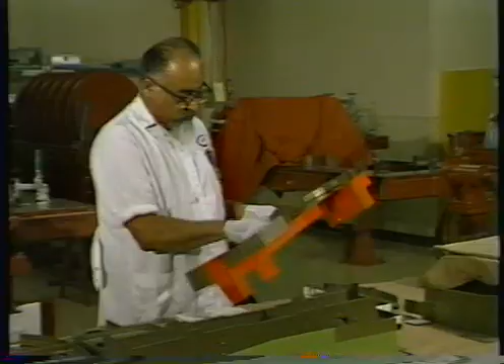Life imitates art in this dilemma that has reached every sector of American industry. For the next several minutes, we'll discuss this growing industrial crisis and what General Dynamics has done about it. While the issues we explore may seem complex, the solutions rely on basic employee ideals: commitment to quality, teamwork, enthusiasm. It all boils down to the individual.

Today, many U.S. companies create products in a vacuum, each station throwing its completed task over the wall to the next. We've simplified a complex issue, but I'm sure you've heard about or encountered some square pegs where you work. You know the real frustration caused by a vicious cycle of changes, rework, and more changes.

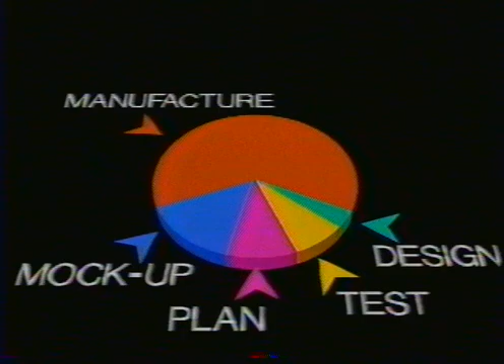The results of our self-imposed barriers have cost us dearly. Even though a product's design phase comprises a tiny piece of the development pie, decisions made early lock in the bulk of later spending. For a typical electronics product, costs rise dramatically as changes are made at each development stage. During final production, any redesign is especially devastating, an expensive alternative that must be remedied.

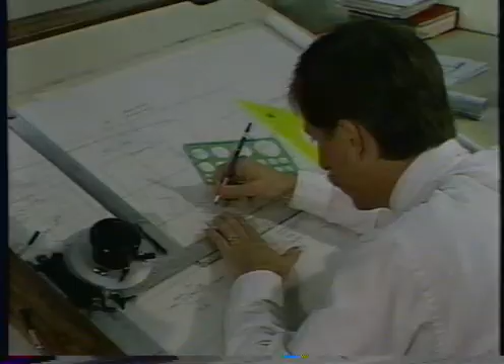And what of the human cost? How does one measure the effects of frustration caused by a system that doesn't work?

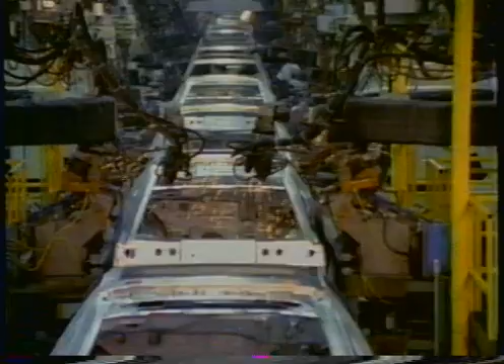During the 1980s, America's solution to this vexing problem was automation. We thought we could out-manufacture the competition with high-tech machinery. Unfortunately, American industry missed the point.

Product development, unlike an assembly line, doesn't happen on a straight line. Rather, it's an intricate web. Individually, the threads are extremely fragile and easily broken. Molded together, we can create a fully integrated, powerful workforce.

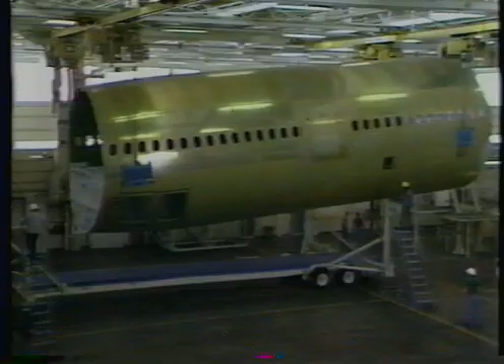At General Dynamics Convair Division, we have a proud heritage to uphold. Over the years, people in the armed services and private sector have come to rely on us and our products. For some of our customers, quality means the difference between life and death.

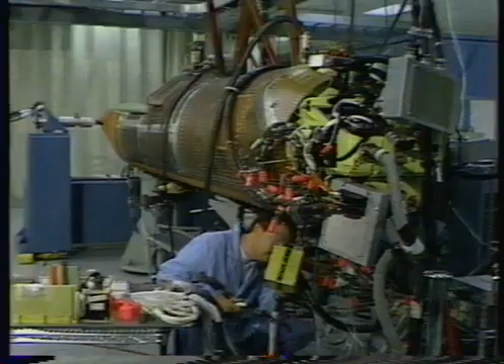But our leadership role has been threatened. Increased complexity, competition, rising costs, shrinking defense budgets, all have had a major impact on our ability to win new programs and strengthen our future.

It's ironic to think that while Convair's work contributed to the winds of change in world politics, it would also change the way we do business. We must change in order to survive.

In an attempt to meet these challenges head-on, Convair has established the Integrated Management Systems Project. Perhaps you've read about or already heard about their ongoing efforts to develop advanced systems and tools, all aimed at integrating our product development threads.

Just as important, though, is their emphasis on cultural changes in the workplace, a real shift in how we create products. If you have to boil the IMS program down to its very basics, we're trying to provide for the...

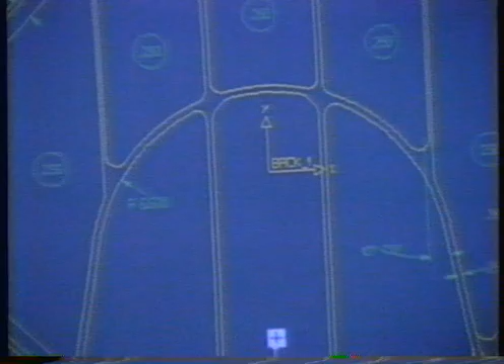generation and sharing of data from the development of a proposal to the government through design, through preparation for manufacturing, integrated logistics support, right through the retirement of the product that's been developed. And throughout that process, have a common database, one common database that everyone makes use of.

Sharing data, being able to get the right data, is the key to concurrent engineering. The effort in the IMS area with focus on concurrent engineering will be to consider the entire process from design to manufacture to maintainability, and to take those issues into consideration before the final design is released into manufacturing.

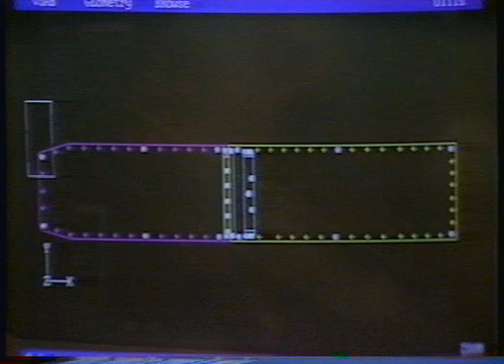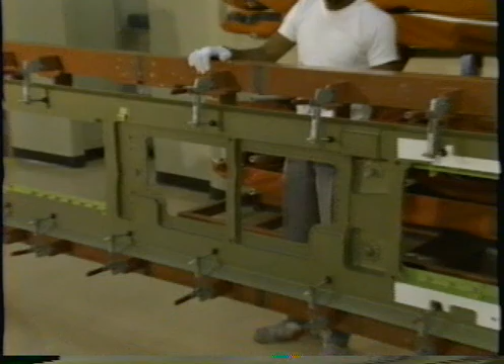Our focus now will be to develop a product with an emphasis on being able to manufacture that product. Selecting the right process and tools before we release it into production. We're going to try and do it right the first time.

For now, let's suspend what we know or what we think we know about IMS, total quality management, or concurrent engineering. You'll probably get a different definition of each depending on whom you talk to. Bottom line is, we need to develop new products quickly.

Those products must be cost-effective and reliable. It's the only way we can increase our business in a rapidly shrinking marketplace.

Not just this program, but a lot of programs are being accused right now of being too expensive, not delivering the performance, and being late to schedule. In the environment that we're in, with the shrinking defense budgets and so forth, we still want the performance. We still want the best vehicles, the best weapon systems in the world, second to none.

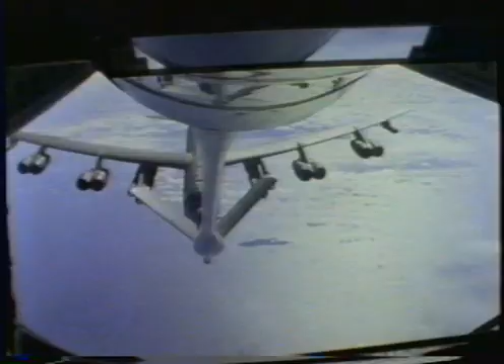You've got to find a smarter way to do your business. And one of those ways is to have this concurrent engineering, or as we put it here at ASD, the integrated product development. I am absolutely committed to concurrent engineering.

I see that as an outgrowth of TQ. It's the right thing to do, and it's starting to work in a number of areas.

The right thing, not only for customers and contractors, but for suppliers as well, who, for the most part, build over 90% of what goes into new products. For example, at Williams International in Utah, where the engine for our advanced cruise missile is built, their long-term commitment to fully integrated product development has begun to pay off.

We can trace it back at least 12 or 15 years when we started the concept called integrated teams, where we decided that for us to get our product into manufacturing at the right cost and on the right schedule, the right quality, you cannot do the design-to-production phase in serial—in fact, you really have to do it as a parallel effort.

So in one of our programs back in the early 80s, one of the cruise missile programs, we started working with the concept of simultaneous engineering.

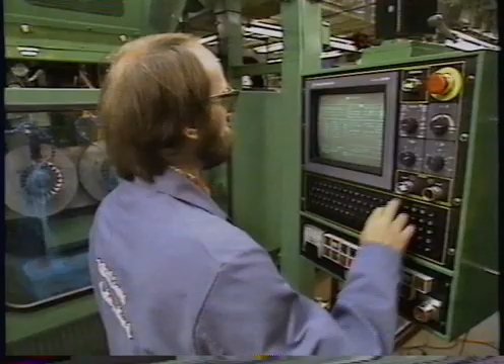What's really good about simultaneous engineering is that you get the manufacturing commitment locked in way up front in terms of what it takes to bring that product on stream, make it at the right cost with the right quality, and sustain it throughout its life.

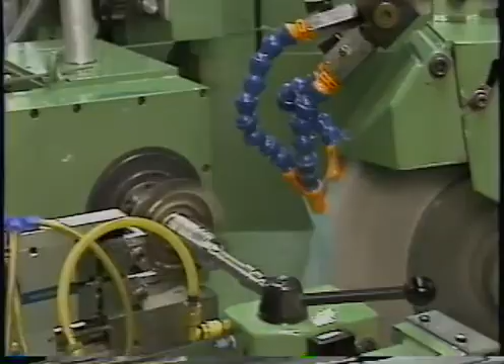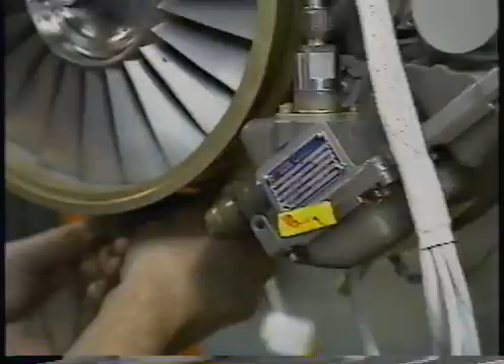The engine company for us, Williams International, has been doing this for a number of years. I was up there several months ago, and we got started into this briefing. Every one of their engines, every one of the spare parts had been delivered to the user - that's the Army, the Navy, the Air Force - on or ahead of their schedule, at the price that they quoted on the contract, and at the performance that the user had asked for, the customer had asked for. And I said, stop. How did you do that?

Well, I would like to say it's the way in which we've modernized the last 3.5 years, because that's how long I've been here. But we've been doing it a lot longer than that, obviously.

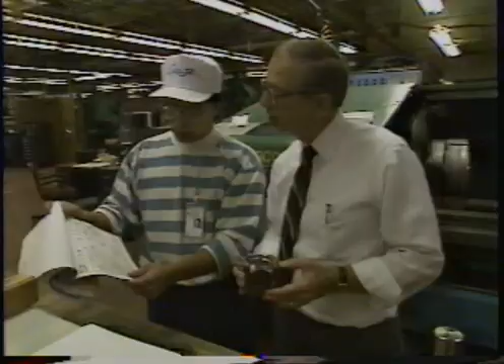I think the key is several-fold. First of all, you have to have a nice, stable product. If you talk to the people that use the engines, our customers, you'll find that they are highly reliable, they're simple to maintain, and consequently there have not been a lot of design changes with our particular product, as there may have been in other kinds of applications or other kinds of engines.

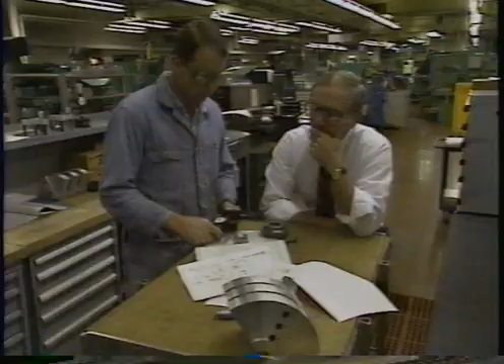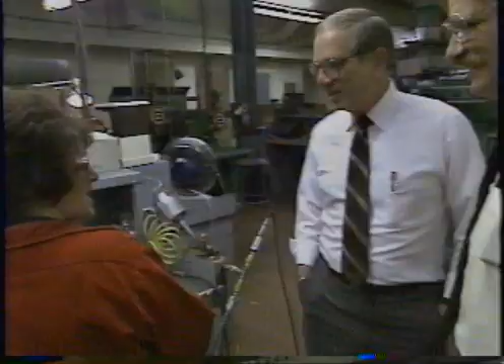That's number one. I think number two is the whole concept of going through simultaneous engineering early on in the program, and then once the program is up and running, not forgetting about that concept, because we still have simultaneous teams to maintain the product during the life cycle of the product.

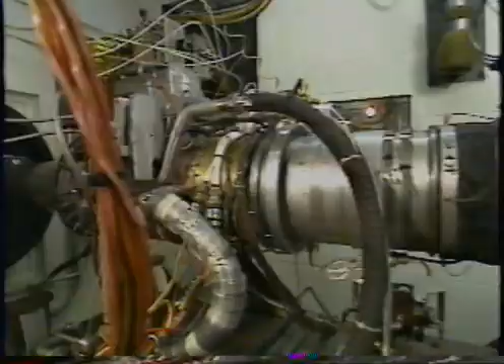When you step up to that kind of a commitment, and everybody knows from almost day one what's expected in terms of performance of that product, in terms of what the customer is looking for, in terms of our own individual quality goals and our cost goals, then it's very easy to make schedule. It's almost routine then to have that kind of performance, because all the other issues are out of the way. All the games playing are out of the way.

Suppliers are going to be our partner in the future. And it's not going to be by contract terms and conditions. It's going to be by a very close working relationship where we depend on them to not only deliver on time, but product that is supportive of the quality standard we must meet, the warranty requirements, the reliability that the customers ask for. We'll work together, not just electronically and communications, but as a team around the table, taking ownership of the total process. It's going to be something new for us to do.

Our typical problems with supplied material are documented. We need to learn how to work together to manage the process better. We look forward to companies like Williams who are truly working hard to establish process controls, minimize the variability in the manufacturing process, improve the quality standards, so that every time we receive product from them, we can count on it.

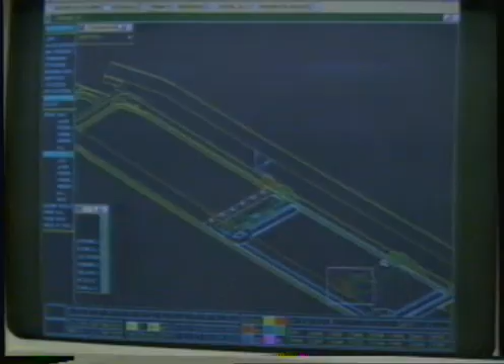Survival, sweeping cultural changes, advanced tools. There's certainly a lot to consider, and the stakes are high. By now, though, you probably realize that our most important resource, the one thing that will ensure fully integrated product development, is people - people who are willing to take the initiative, perhaps take a few risks, in order to recognize our need for change, then do something about it.

Here at Lindbergh Field's Advanced Cruise Missile High Bay, where components are readied for final assembly, a total quality management committee has been established. This cross-section of hourly workers, chaired by a salaried supervisor, looks for concrete ways to put these changes in motion. We're going to have to work as a team together.

Exactly. The whole reason we're coming in with TQ is to allow you the opportunity to tell us how to do it better. For years and years and years, top down, management tells you what to do. Well, we're wrong.

The folks on the floor are the experts, so you've got to tell us. And then you've got to stand up to that. You've got to let the person, when he says this is the way to do it, let him go run with it.

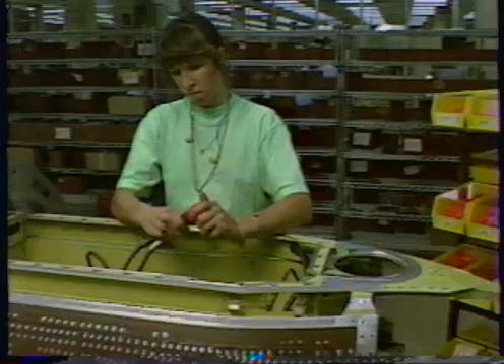In all the examples I've seen from other companies, employees are extremely smart and clever. And they're the first ones to say, bad idea, if it's their idea, bad idea. And they'll change it. So to that employee, I would say, you're important. Your ideas are important. You may be absolutely right to keep it the way you are. Let's sit down and talk about it and go from there.

Recognizing the value of our employees is especially critical during the early stages of new programs, like Convair's ACM variant. Established to meet the evolutionary needs of our Air Force customer, Variant will carry ACM through the 21st century. What better time to introduce a new philosophy which holds the same promise?

I'm trying to get it all set up.

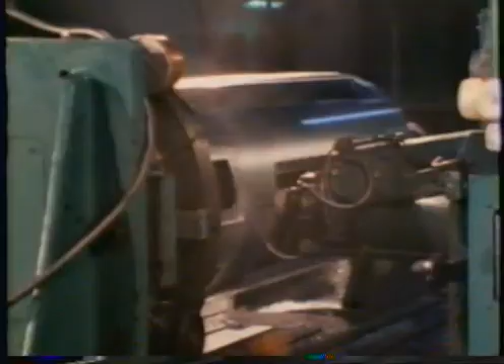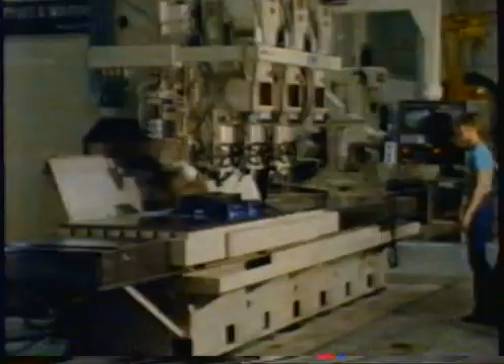I started out from my perspective of what is it we want to do different here on the Variant program? One of the experiences I lived through was the transition into production on the Tomahawk program, and we had a very, very difficult time doing that. I constantly asked myself why. What is it that's lacking here in terms of our ability to transition the systems that we design into production?

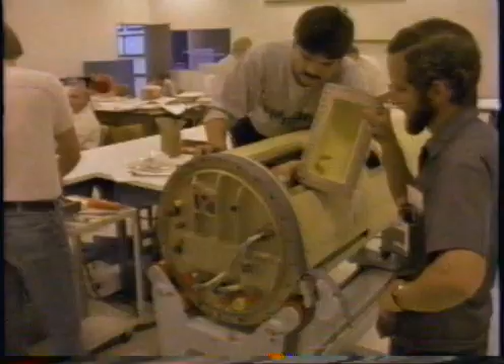One of the engineers who was a principal engineer in designing the MCM on Tomahawk, the Mission Control Module, got called off of engineering to go down and help assemble that. And he came back from that assignment and said, my God, had I known what I was doing here, I wouldn't have done it that way.

How can we solve that problem? That's one of the questions I ask myself. In the past, there's been consensus that our transition process has not been effective. Not being able to build it, not starting on time, shortages, test failures, change. Hurry up and do it wrong again so that we can effect another change. Typically what's happened is more teams are formed, more signatures go on drawings, more controls are inputted into the system, but the bottom line or end result is still the same. The parts just do not work well the first time we attempt to manufacture them or integrate them.

The future says that the team is going to take total ownership of that component, that product, that system. One of the fundamental principles I've established on the program is commitment of people for a fairly significant period of time, so that if it doesn't work, there's no one they can blame except themselves, because they've got input in the design, they've got the ability to significantly affect the design and the outcome. They're working together as a team. They're the ones that will be standing up to the customer and explaining all aspects of what they're doing. It helps get them focused on their real job in life, which is to get this job done, on cost and on schedule, or ahead of schedule and under cost.